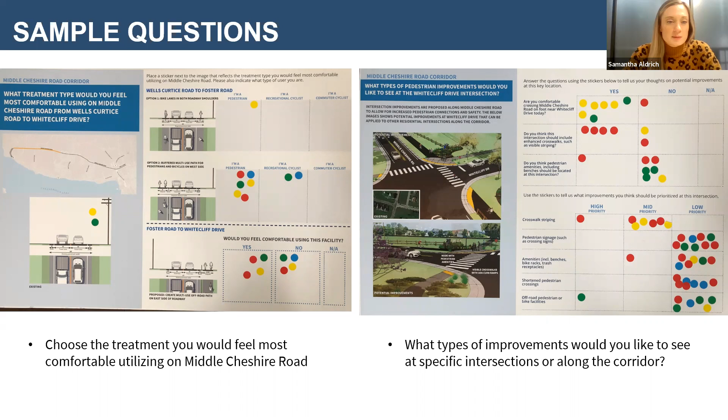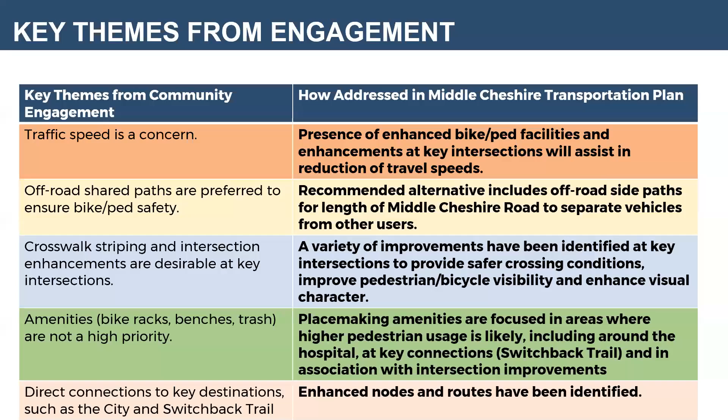And really, we address a lot of the concerns that we heard from community members by providing a physical separation in our recommendations for vehicles compared to those pedestrians, and implementing or recommending the crosswalk striping, signage, and amenities that really raise awareness for vehicle users related to pedestrian and bicycle users as well. And I will hand it over to Dave to talk about some of the traffic analysis that we have conducted.

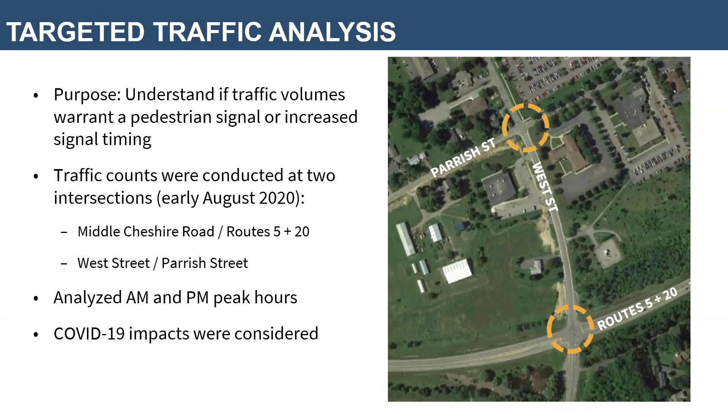You can move the slide ahead. We also did a general level of service analysis. Like I mentioned, at West and Parrish a signal is not warranted, and the level of service there is actually pretty good. There's not a whole lot of traffic delay there. We are looking at some improvements to improve the pedestrian crossings, but there's no need for any additional traffic control there to improve level of service.

At Middle Cheshire and Route 5 and 20, the intersection is well under capacity, a level of service B, which is a very, very minimal delay. One thing we wanted to look at for this intersection, to help improve the pedestrian crossings there, was adding a 5-second lead phase.

What that does is the signal for traffic remains red, and when actuated, the walk indication starts. It allows people to step out into the street so that when the traffic light does turn green, drivers can see pedestrians already out there. It prevents a lot of the typical crashes you'd see with vehicles making turns. If you're making a left turn and see somebody already out in the street, it's a little bit easier to notice if they go first.

So we did that analysis and found that, once again, it doesn't add that much delay to the traffic. So that would be one of the things we could do at the signal. I believe that's it for my section. I'll hand it back off to Sam.

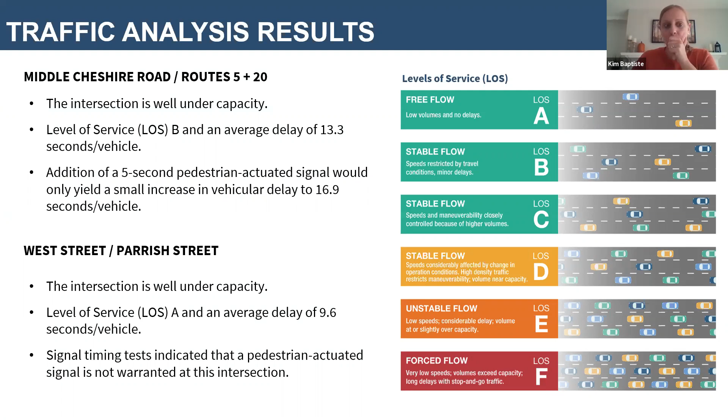Okay, so I think Lindsay, we're handing it over to you now. Yeah, so I'll walk through the bicycle and pedestrian recommendations along the corridor end to end, and then we'll get into some of the other details.

The majority of the recommended treatments are located along the east side of the roadway for the entire corridor of Middle Cheshire, with the exception of Wells Curtice to Foster Road. There we recommended a side path on the west side of the roadway that would transition to the east side at Foster Road, and we'll get into that in a bit more detail. The side path would accommodate both pedestrians and cyclists, and would have a variety of buffers throughout the corridor, which we'll also discuss in more detail.

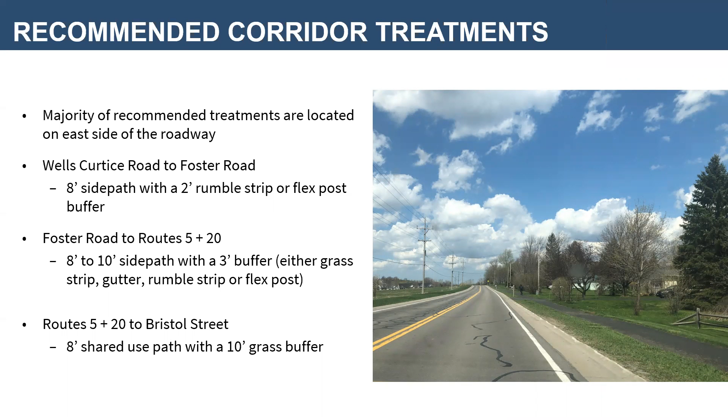So again, just a visualization end to end of the corridor. It would be a shared use path. You see the one small section that would be on the west side instead, where a shared shoulder or bike lane on Wells Curtice Road was recommended.

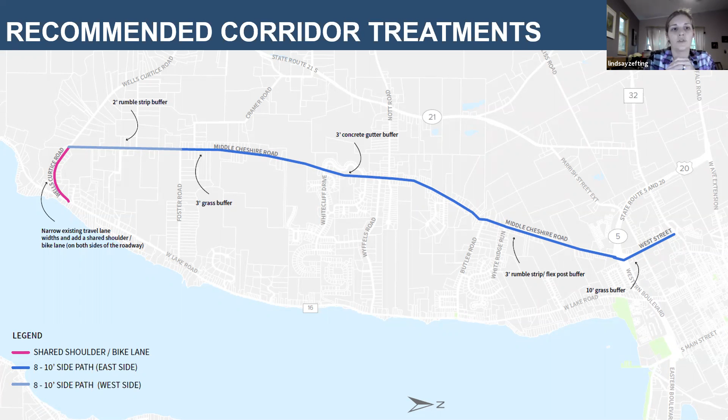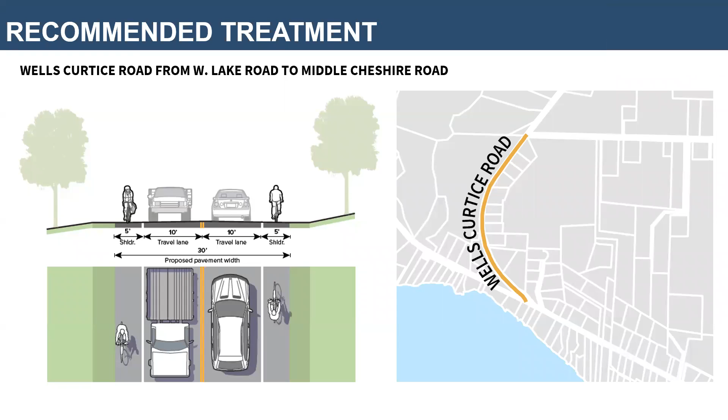So again, this is the recommended treatment for Wells Curtice Road: widening for a 5-foot shoulder while maintaining the 10-foot travel lanes, which would keep speeds lower on that roadway. That would transition at the intersection of Middle Cheshire to a side path on the west side of the roadway, essentially maintaining the cross section more or less as is. But the existing shoulder on the west side would include a rumble strip, potentially flexible delineators as well, creating that buffer between pedestrians and cyclists on the west side.

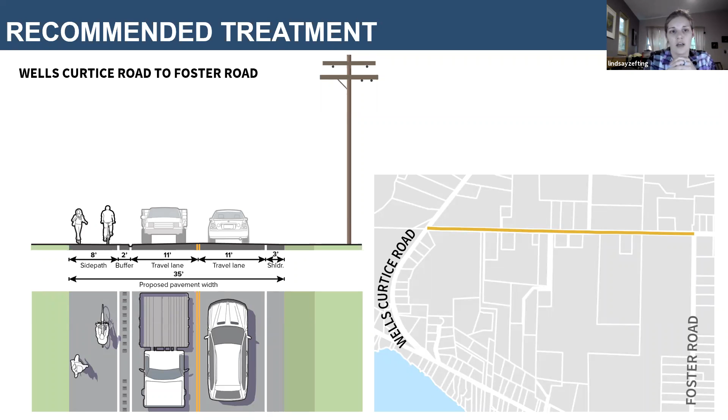The transition would just be a simple crosswalk at the intersection of Foster and Middle Cheshire. That could be enhanced into various crosswalk treatments, using an RRFB. A raised crosswalk in this location probably wouldn't fit the character, but an RRFB could be used to enhance this crosswalk and yield compliance. Really, it's just a simple crosswalk on the north side so that you're only crossing at one location to transition.

This is a discussion item I wanted to bring up today, because we are on the east side of Middle Cheshire the rest of the way. Should we consider recommending the side path south of this location, south of Foster Road, on the west side, and on the east side instead?

The reason we had initially recommended the west side is because there are fewer conflicts and fewer grade issues. So the construction of widening the roadway to build the shared use path would be a little more challenging, but would be more consistent to the corridor. There are a few more driveways, a few more mailboxes, and again those grade issues. You'll have a little of that on both sides of the roadway, but they're more common and frequent on the east side.

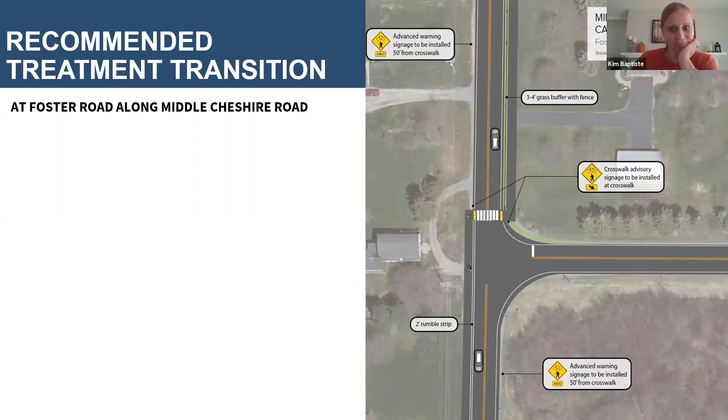Anyone have any thoughts? Quiet group today.

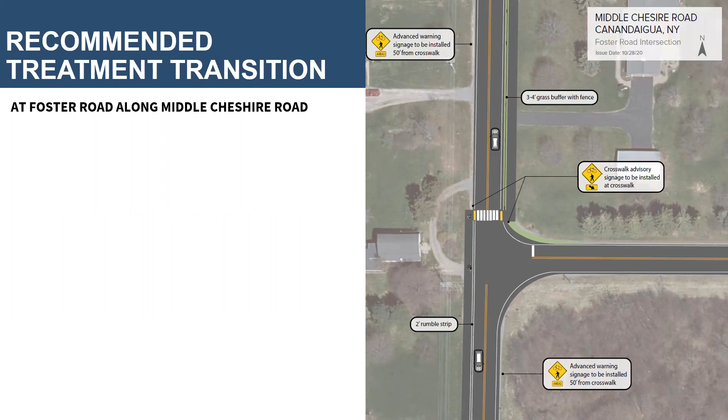Yeah, I'll comment. I live out in that area, just north of Wells Curtice Road. On the opposite side of the road, the west side, my neighbor across the road has about 20 acres that's going to be continually farmed. Just north of her house, it's all farmland also.

So the bulk of the property on that side going up to Johnson Road is primarily farmland. Until you get just south of Johnson Road, there are several new houses that have been built. It just seems to me that on the west side, there's less intrusion on people's property.

Exactly. Even with the crossing at the intersection of Foster and Middle Cheshire Road, I've lived out there for 35 years, and the amount of traffic at that point, other than early in the morning with people coming up to Middle Cheshire Road toward the Rochester metropolitan area, is pretty light out that far. The bigger developments are more north of that, up toward the city of Canandaigua. So a crossing there, in my opinion, wouldn't be a dangerous situation.

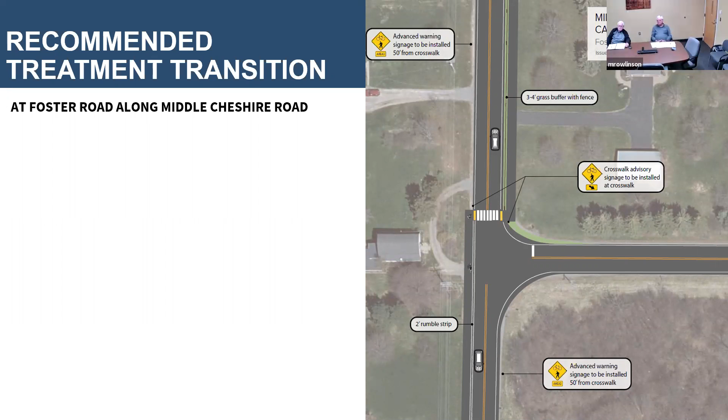Any other thoughts? Not in that area yet. Okay.

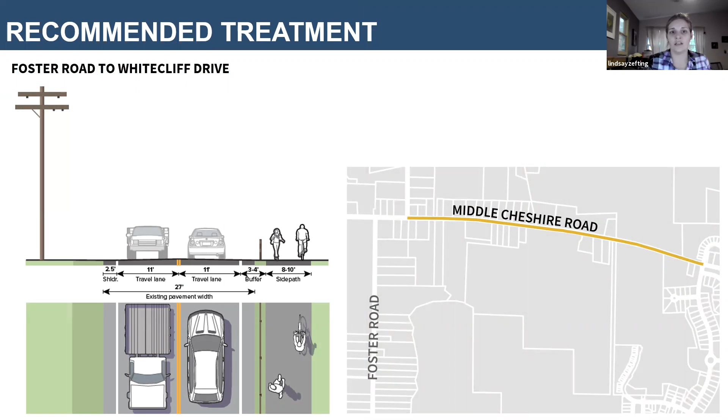So continuing to move north from Foster Road to Whitecliff Drive, this would be a shared use path 8 to 10 feet wide on the east side of the roadway. Again, that barrier type can be a number of different things, and it's easy to transition that through the corridor.

That transition and change can happen as frequently as needed. It's the consistency of the shared use path that's important from a bicycle and pedestrian expectation and user-friendliness standpoint. A split rail fence can be used as an extra level of separation, along with a grass median, the existing gutters that are out there, or a curb. So there are a number of separation types to consider that fit the character and existing conditions.

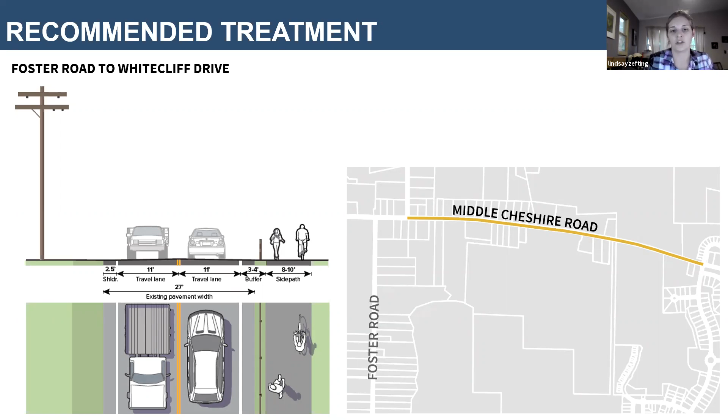Continuing north, again a shared use path is the recommended alternative, 8 to 10 feet wide. This is where we start to run into some utility pole conflicts, so we imagine some variability between that 8 and 10 foot width to minimize the impacts or utility pole relocations.

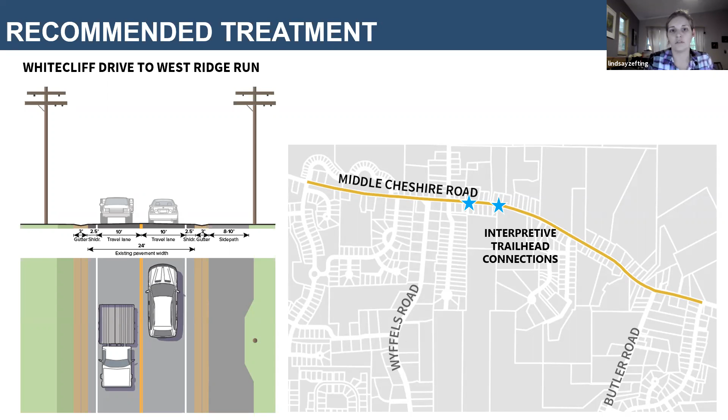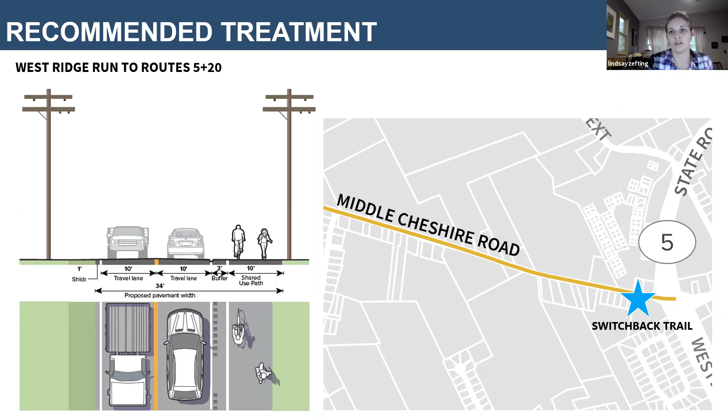Similar to the southern end, this would be a widening of the roadway using some of the existing excess pavement width to still create the 10-foot wide shared use path, but within the roadway space as opposed to separated by grass or the concrete gutter, continuing that shared use path along the east side. The 10-foot travel lanes and narrower shoulders will also help calm traffic and provide a more comfortable walking and bicycling environment through this area.

Then between Route 5 and 20 to Bristol Street, still on the east side but further removed from the roadway, we're recommending an 8-foot shared use path in that existing space.

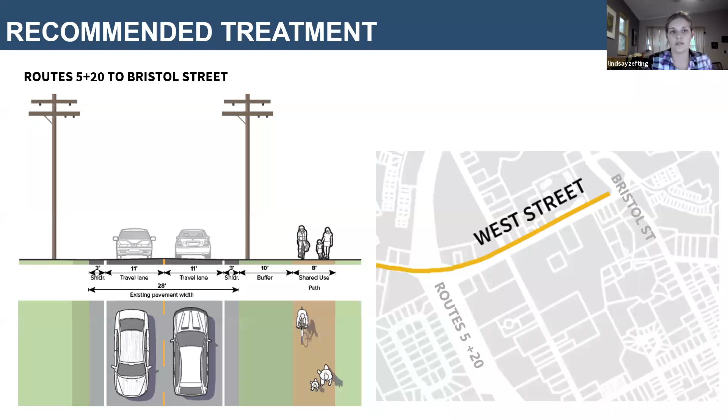So that provides a consistent treatment for bicycles and pedestrians for the full length of the corridor. Any thoughts or questions on that piece?

I think you guys have done a great job capturing all the feedback you've gotten from the public and the committee over all of our meetings. It's nice to see it on paper, and it's exciting to see what we might get to try to do.

Great, thanks, Sarah. So thank you. Okay, so Ted's going to take it over from here and recap some of the intersection treatments that we had talked about our last meeting, and there's been some minor modifications, and then also talk a bit about some of the placemaking elements in a little more detail than we previously touched on. So with that, it's all yours, Ted.

Okay, thanks, Kimberly. All right, so as Kimberly mentioned, we're going to take a look at some of the recommendations that we've previously looked at that we've tweaked a little bit and kind of confirmed with some of the public feedback, some of the recommendations that we are proposing here.

So starting at the southern end of the corridor, where Wells Curtice Road meets Westlake Road, we're really looking here to build upon previous studies that were done with this intersection to see how we can reduce the pavement width, narrow the intersection opening to make it less of a vast open space and help define the different uses, the striping and signage to really direct cars where to go and also to provide that opportunity for bicyclists to use the shoulder to work their way up to the Middle Cheshire Road corridor.

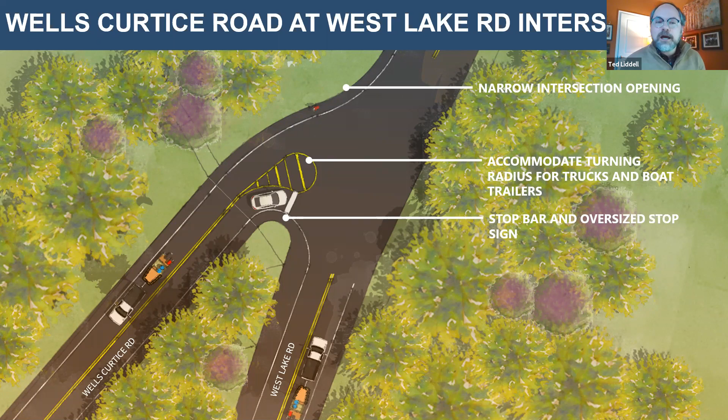So we would be looking to do this to make these recommendations while still being able to accommodate things like trucks with boat trailers and farm equipment that may need to have access at this intersection as well.

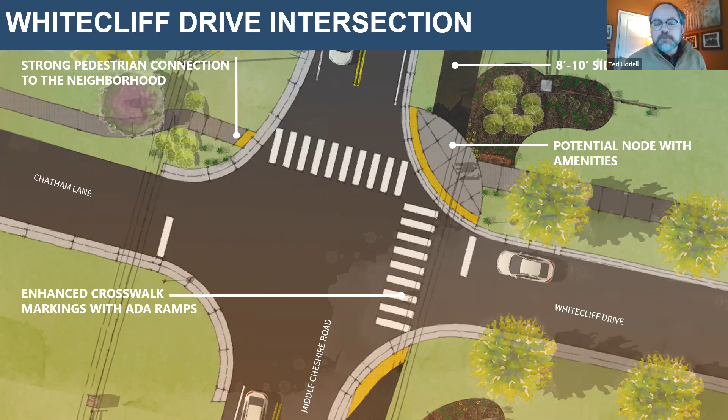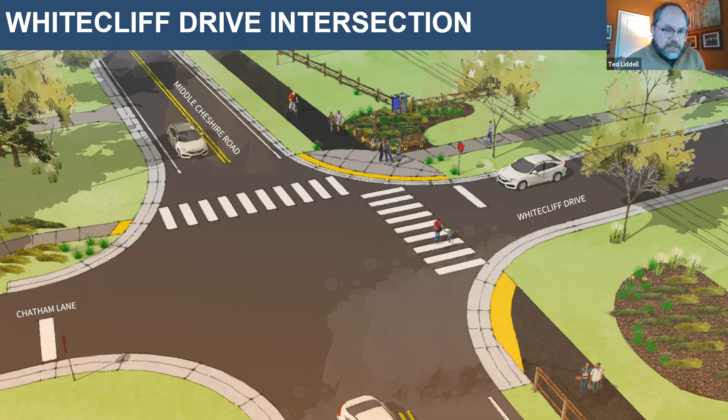At the Whitecliff Drive intersection, in the public feedback that we received, pedestrian accommodations, making sure that the sidewalks connect to the crosswalks and creating those ADA accessible crossings and having the enhanced crosswalk markings were the priority and what was important. In these recommendations, we are still showing some of those placemaking opportunities and to incorporate wayfinding, site amenities like benches and things like that to help define the corridor, which we will talk about a little bit further on.

And you can see in these images too, some of the opportunities for those barrier treatments that Lindsay was talking about and how we can incorporate those into the project to increase the pedestrian safety.

At Route 5 and 20, again, the big concern here and priority was pedestrian safety. Obviously, there isn't a crosswalk here today, so that ranked pretty high as for incorporating that crosswalk and the pedestrian accommodations, the pedestrian actuated signals at this crosswalk.

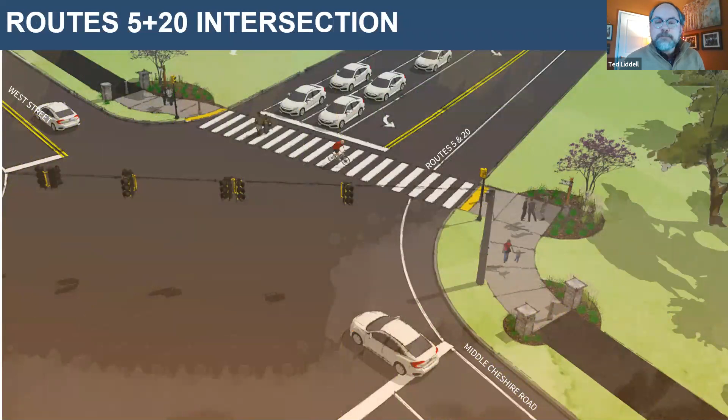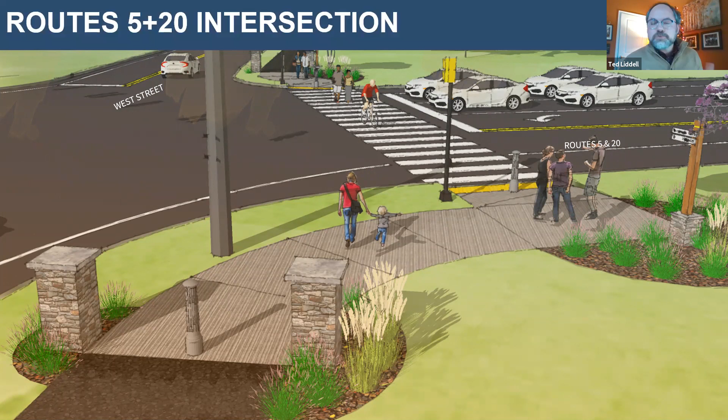The amenities were less of a priority with the community, but the amenities will also help to enhance the safety of this crossing by including amenities like bollards and the stone piers and the wayfinding signage. It helps to signalize to the users of the corridor that they're coming up to a pretty significant intersection, that there's going to be a change in environment here that they really need to pay attention to. So it'll just help to increase that sense of safety.

At the intersection of Bristol Street, as Dave had noted, the data didn't warrant there to be a signalized intersection here. But what can we do to still improve the intersection for safety for users?

Again, providing those ADA accessible curb ramps and the enhanced crosswalk markings were pretty high on the priority list for the community members that participated in the workshop and in the online survey. So incorporating that to really create that consistent, safe corridor was important.

Now, before moving on to some of the placemaking nodes and opportunities, were there any feedback or comments from the intersection treatments? It is a very quiet group today.

Yes, I'd like to say something. Sure. In regards to the Middle Cheshire and your West Street, I've lived out there before, you know, before the bypass was installed. And the people going south on West Street, they get ready to turn. There's only one lane there. You aren't proposing to put two lanes there like you have on the south side of 5 and 20? So people can turn and also either way or go straight?

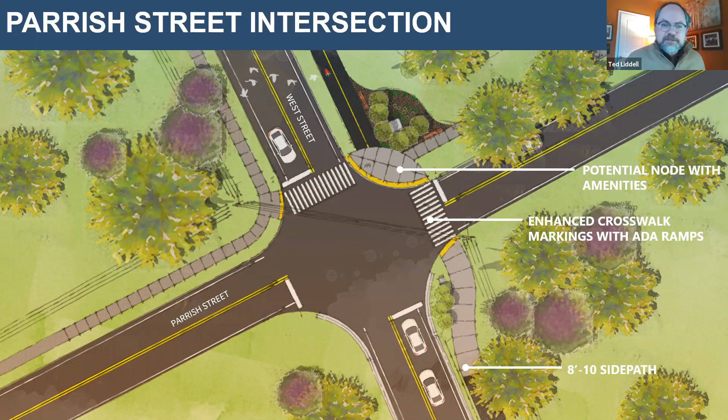Are you at the intersection of Bristol Street or the intersection of 5 and 20? What, 5 where, and 20. West Street and 5 and 20, going south.

Actually, guys, what's labeled West Street is not West Street. That's Parrish Street. That area is still Middle Cheshire Road. It starts at West Street at the city line. From the intersection going north to Parrish Street, that is officially part of Middle Cheshire Road. Okay, so you have West Street there. I'd like to speak to a little bit of the history of that intersection.

About 15 years ago I was chairman of the planning board here in town, and there's a housing development called the Villas, built just south of that intersection on the west side of the road. The area had to be rezoned, and the town board at that time used the incentive zoning process as a conduit to change the zoning to allow a denser build out. In exchange for that incentive, there were some amenities promised to the town by the developer. One was to put a turning lane to turn east from Middle Cheshire Road as you're heading north, as you have depicted there. Another was to have, on the opposite side of the intersection, a turning lane so people could turn to go north. This was really done to accommodate the change of shift times at the hospital, F.F. Thompson Hospital.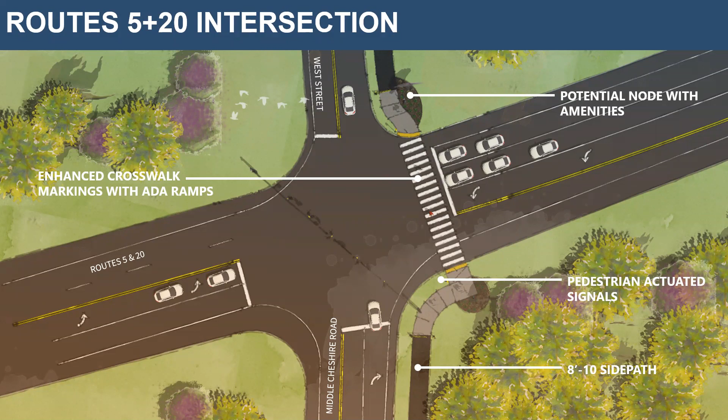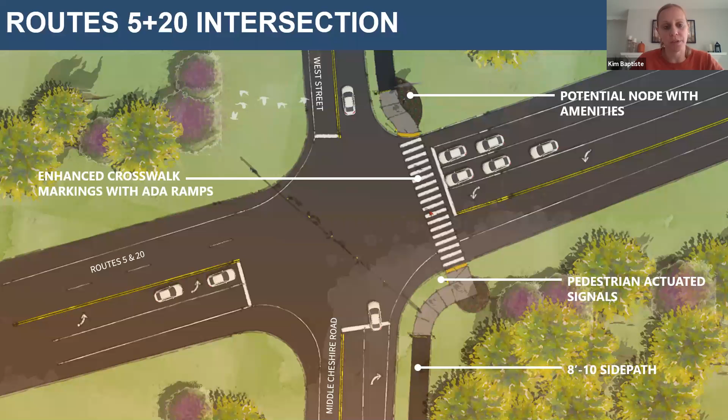This might be an opportunity that we can talk to DOT about some of the concerns you just brought up, and determine a good way to address them within the document.

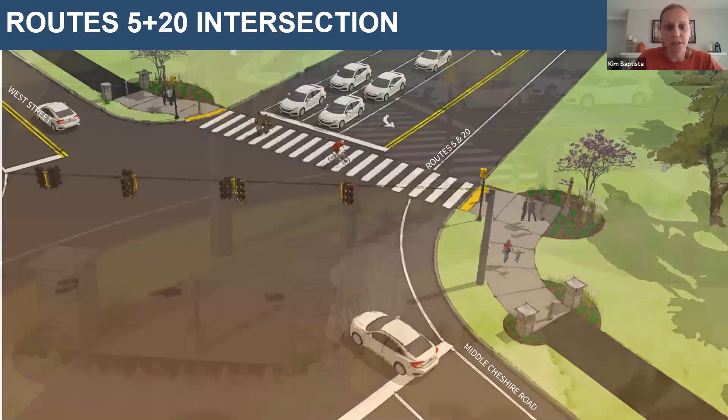So Ted, I think you were going to go on to placemaking. Yes. One of the other items that came through this process that was important was not only looking at the corridor, the Middle Cheshire Road corridor itself, but also those east-west connections that provide connection to the waterfront, connection to downtown Canandaigua, and also to the hospital.

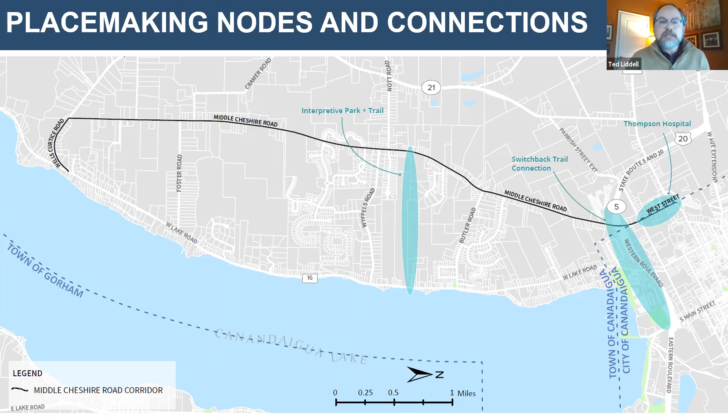This plan would have to be further vetted and designed, but the thought was that there is the opportunity here to create a unique kind of eco-friendly trail with a variety of trail surfaces, boardwalk facilities that might go through ecologically interesting areas and wetlands, creating the opportunity to bring people to nature and to help interpret and celebrate some of the natural assets in the area.

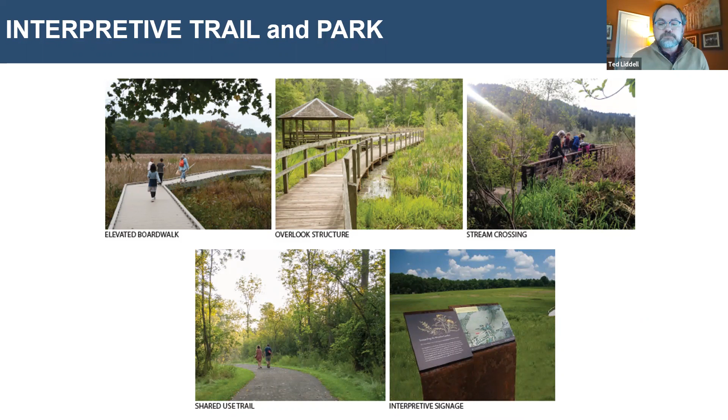Any initial thoughts on this interpretive trail concept?

We have had residents approach us and ask if we could ever consider putting a trail there, especially since the water treatment facility already has the road. I like the idea of considering it, but that wetland area, I think, is actually a conservation easement managed by the Finger Lakes Land Trust on town property. I don't know what restrictions that easement has, or if we'd even be allowed to do that. But if we could, it's a neat idea.

I'm sure people would agree that would be fun, but of course we've got to look into it and see what would even be possible or plausible. Yeah, we can take a look into that to see if there's anything that would preclude this from being a possibility. But it's good to hear that there's interest for something in this area if it's possible.

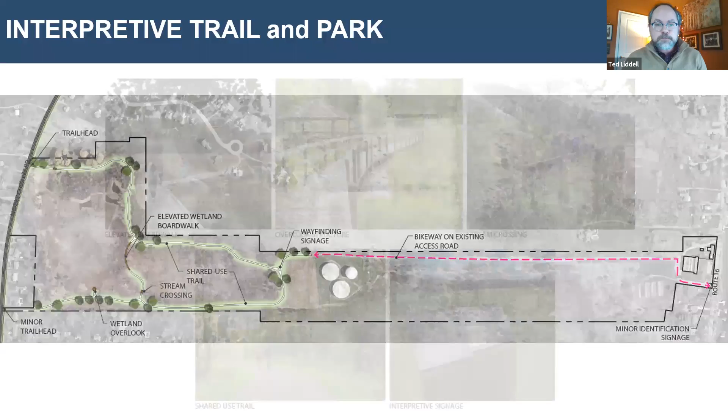One of the other areas we looked at was in the area of Thompson Hospital. This section of the corridor, as we've discussed in past meetings, is more of an urban kind of area. A lot of people work in this area and use the sidewalk facility to take breaks and walks during their lunch and things like that. So what we're looking at here is creating, having that trail facility along West Street, but creating opportunity nodes for things like outdoor exercise equipment stations, activity stations, benches, and things like that along the corridor.

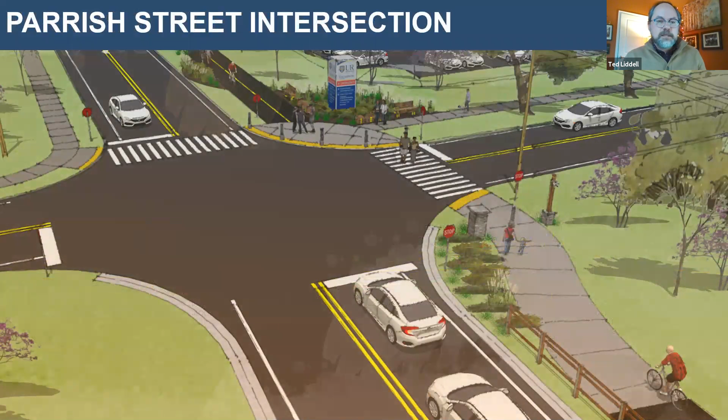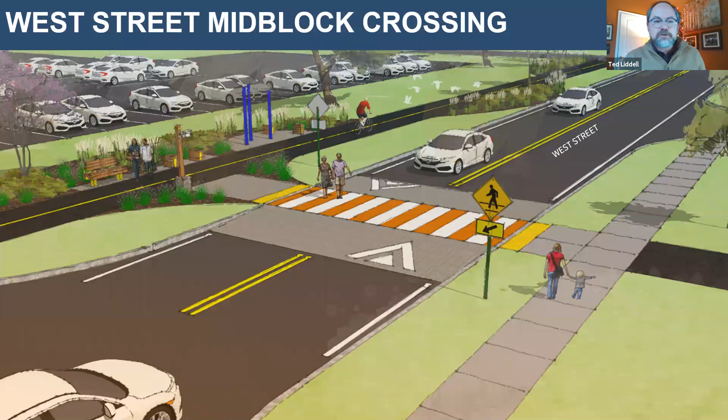Using things like wildflower plantings helps to reduce maintenance. These areas wouldn't need to be mowed as often as traditional turf. This creates a visually appealing ribbon tying together all these potential node areas. Here are a couple views, including the intersection of Parrish and West, showing the northeast corner with the Thompson Hospital sign, illustrating what those nodes could look like. And here's another image of one of those nodes showing pedestrian accommodations and potential trail fitness type amenities and facilities.

Any initial thoughts on this concept before we move forward? Okay.

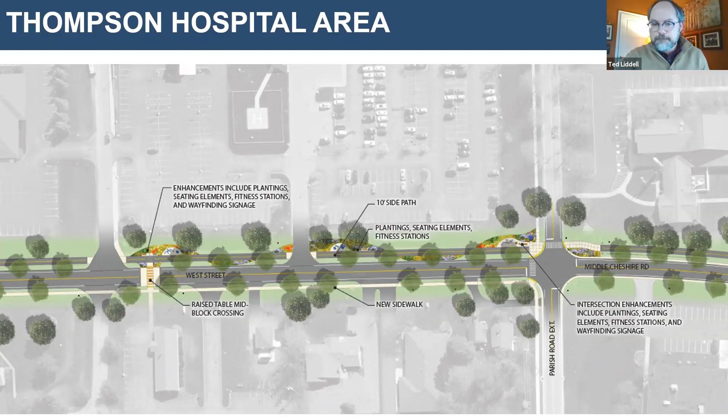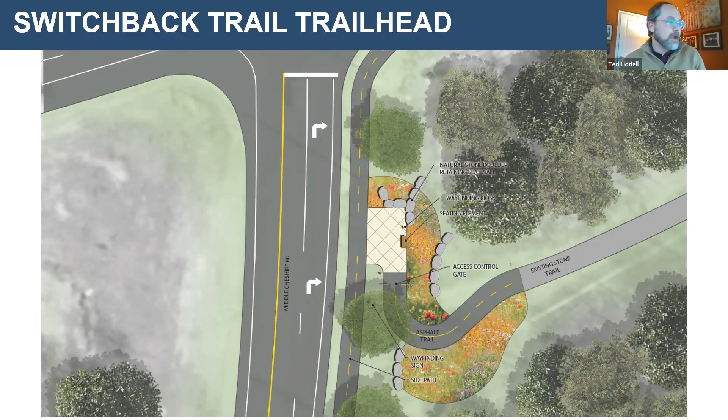One of the other amenities we looked at was the existing switchback trail, which we noted in past presentations is kind of hidden. It's not easily accessible or visible from the Middle Cheshire intersection area or from West Lake Road. This concept plan shows creating an entryway to that existing switchback trail, with a new proposed path facility on 5 and 20 that allows us to play with the landform and create a more curvilinear path to deal with the change in grade, making the switchback trail more accessible to a wider variety of users. Here are a couple graphics showing what this switchback trailhead could look like, easing down the slope with a curvilinear path and creating an entryway with amenities like wayfinding signage, interpretive signage, benches, and bike racks.

This image is actually a good segue to our next topic, which is some of those placemaking amenities and the placemaking palette we're looking at.

But before we move on to that, is there any initial feedback on this concept for the switchback trailhead?

One of the other things we started to look at was an amenities palette. Placemaking and corridor identity is another area we were looking at as part of this study. Some things we looked at for inspiration, to help tie these amenities to the context of the corridor, were existing plantings and materials being used today. We have pictured here goldenrod, a perennial throughout the corridor. People might first think of allergies, but goldenrod has this bright, vibrant yellow color that can be distinct and serve as inspiration, as well as the use of fieldstone and timber, natural materials prevalent throughout the corridor that help ground the corridor and tie it into the surrounding environment.

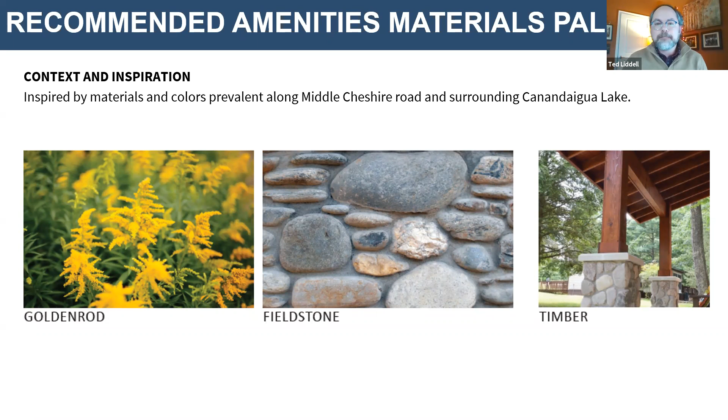Keeping in theme with the wood and the color, looking at site furnishings that draw upon that as well, using wood materials. These show a series of different types of seating amenities, using wood and also metal with that bright yellow color to help tie everything together.

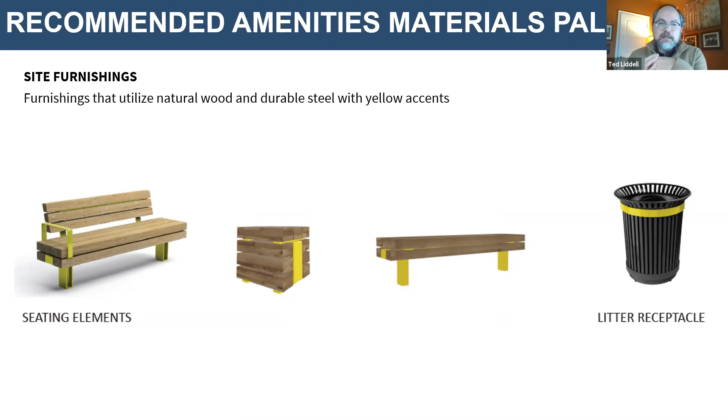Now, in this study, these are the recommendations that we are making, but I wouldn't want you to think that this is the be all end all for these site furnishings. I think the key takeaway here is that as these projects go further into design, you will really want to take into account the context of this area, making sure that plays into the site amenities, and that the site amenities are consistent throughout the corridor and help create that identity. So there could be tweaks in color, tweaks in material. Those are things that can be further discussed and analyzed as these projects actually go into implementation in the future.

Are there any thoughts on the kind of recommended materials palette and amenities before we move on to the next steps?

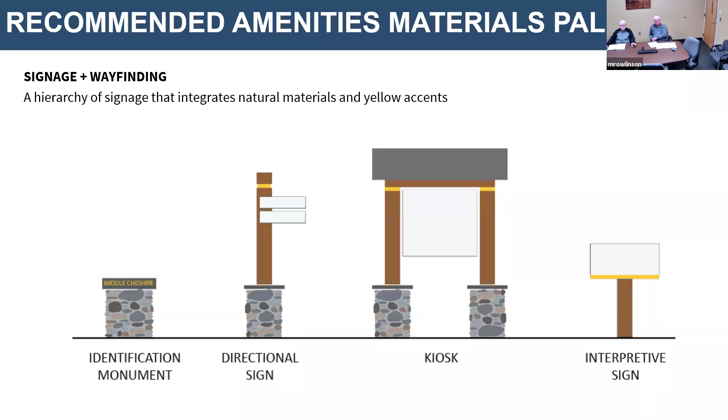All right. Well, I guess with that, I'll turn it over to Kimberly for the next steps.

Okay, so we are getting close to the finish line over the course of the next month based on these concepts, and as long as there's no strong objections to any of our recommendations, we will move forward with developing cost estimates for improvement, as well as an implementation strategy, which will address not only the costs but also phasing and interim steps that may be required in order to advance any of the projects, and then pull it all together into one compiled report.

So our goal would then be to provide the draft report by late November, early December to the committee for review, have a subsequent committee meeting to review any comments and answer any questions you might have on the draft report, and then move forward with another public meeting to present the recommendations and findings from the report before the end of the year. So those are the key milestones that we still need to hit, and happy to answer any questions on remaining schedule that anyone might have.